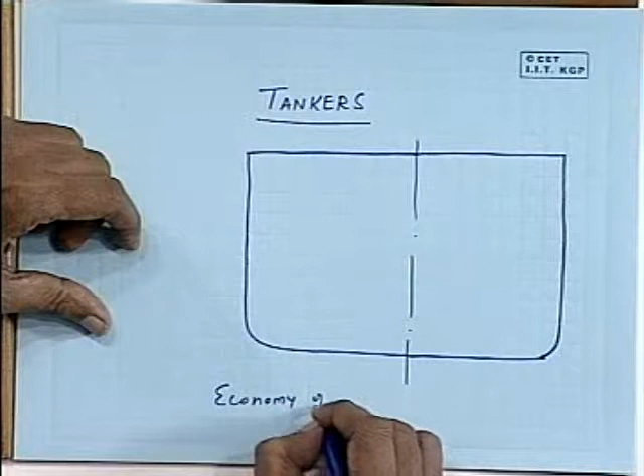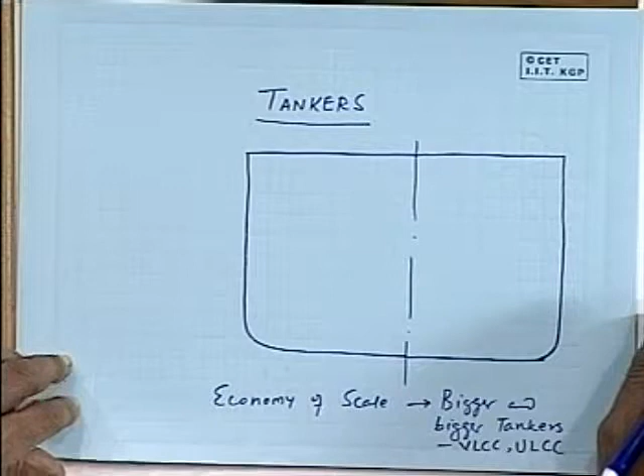So just imagine, stress levels were low, vessel is safe, no complications with regard to cargo handling. And it's just ideal to carry cargo, isn't it? As a mariner you will say, this is really good. And this is what people said, that carriage of oil cargo at sea was the easiest thing to do. And as a result, economy of scale led to bigger and bigger tankers. So you had the so-called VLCCs and ultra large crude carriers, ULCCs, going up to 500,000 tons or even more, at least the thought was there. So this was the scenario in the 60s and very early 70s.

Then came the oil crisis, 73 war, and oil prices went up. So when oil prices went up, suddenly there was no demand for movement of oil as a cargo at sea. Country like India, if oil prices go up 10 times, obviously we cannot import the same amount of oil we imported. This happened all over the world. And oil tanker size suddenly reduced. I am not going to deal with the changes in the shipbuilding side, looking at the design side alone, the development of tankers as a crude oil carrier.

We see that suddenly there is a move towards building smaller and smaller vessels, because economy of scale is fine as long as you have full load of cargo. If you do not have full load of cargo, then you must build smaller ships so that at least your ship is full when it is moving. And as we have discussed earlier, tankers move only half their lifetime with cargo, other half they are moving in ballast. So the tanker size came down to 50,000-60,000. Now I think it is stabilizing around 100,000, 1 lakh or thereabout. Panamax tankers are of course there, 60,000 to 70,000 tons, and people have built slightly bigger tankers, about 100,000-120,000 tons, not more than that.

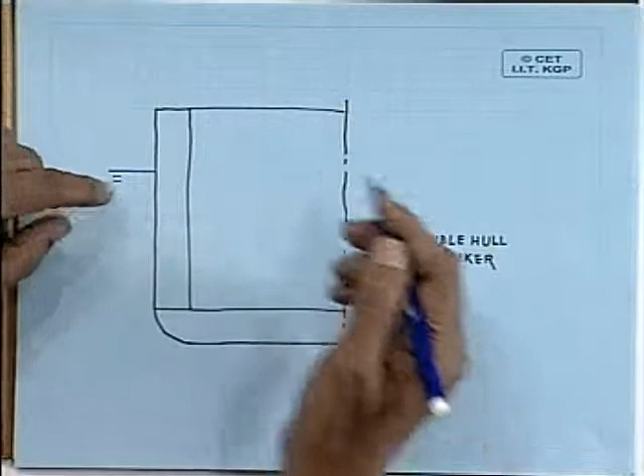You know that tankers are given type A freeboard, isn't it? Type A freeboard means minimum freeboard. This double hull tanker can never achieve a deadweight which will sink it to the maximum draft coming out of the type A freeboard. Do you understand? That means if this is the draft as per freeboard, Plimsoll line draft, you can sink this vessel to this draft only when you have enough cargo weight to sink the ship.

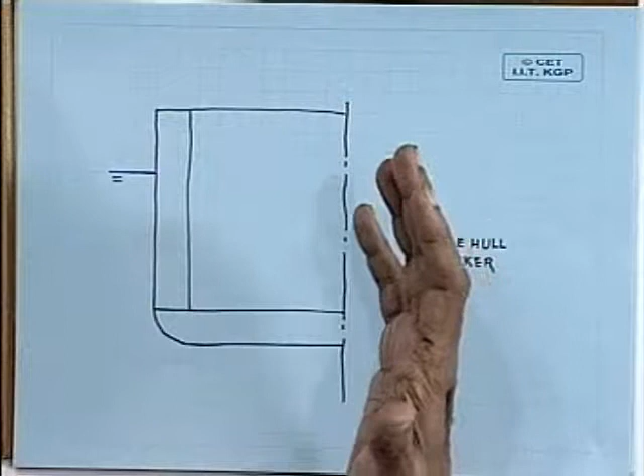Now, oil has a particular density and it can only go in covered holds, closed holds. Once you take away this space, it is not enough to give the ship the type A freeboard. So nowadays for the double hull tankers it is very difficult to achieve the maximum designated freeboard, which means in other words loss of revenue, right. So this is what has happened to tanker business.

And of course, when we talk of voluntary oil discharge, that is discharged through engine room, through bilges, through tank washings and other things, you are aware that a lot of extra equipment has been provided in ships for doing this. That is, you have the oil water separators, you have slop tanks which again take away freight earning space, you have segregated ballast tanks, segregated pipelines, segregated pumps, slop tanks, the small pipelines for cleaning. No, crude oil washing lines, of course, crude oil washing systems you have.

You have these small pipelines for removing the, what is it called? Steam? No. You have these positive displacement pumps and small pipelines for the stripping system, right? Stripping system, you have the crude oil washing system, you have the inert gas system without which you can't do crude oil washing, and you have the oily bilge water separator, you have the oil content meter to measure the oil content, without which you cannot discharge. You simply don't have an avenue to discharge, you don't have a line, and you have to log any discharge you make to the sea. So you see what has happened is, from being a very cheap and structurally sound ship, it's slowly grown into a very complicated, expensive ship which cannot carry cargo as per its freeboard.

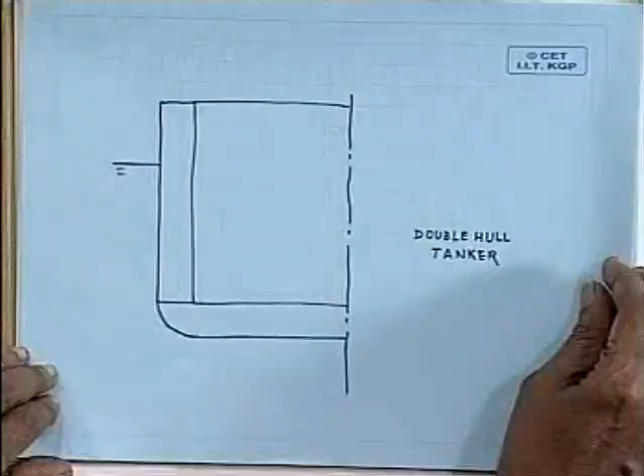So, this is the tanker scenario as of now, and let us see how it goes in future, because as the oil becomes expensive, the freight also becomes more, and to support that you have to have a more sophisticated vessel. You see very interestingly how the trade scenario matches with technical and environmental developments. Everything sort of matches, isn't it? So, this is how it is.

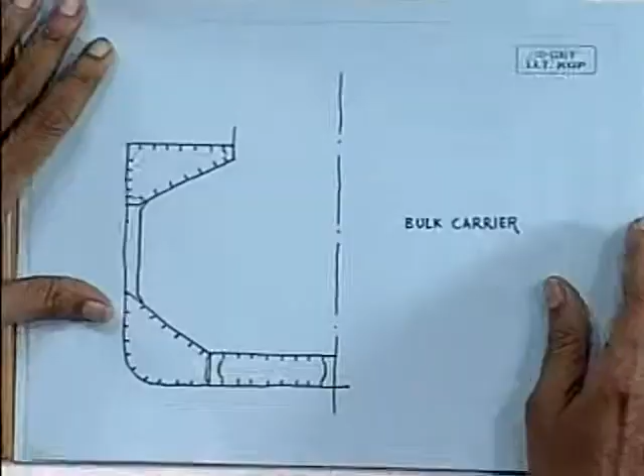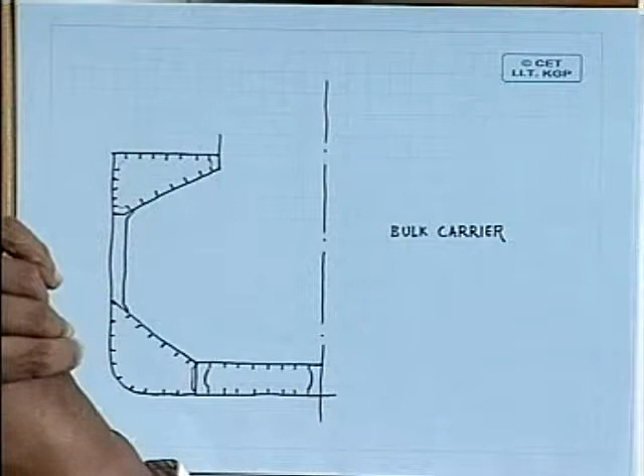Now, let us look at bulk carriers. We have here a bulk carrier. This is how a bulk carrier would look, right? Can you tell me why the top sloping tanks are required? Yeah. So, you have about 30 degrees inclination, so that any light grain which is likely to shift is restricted from shifting. Your grain shifting will be limited to within the hatch covers. You have to calculate that and show to the authorities that your total grain shifting even inside the hatches is within a certain limit. But in bulk carriers, grain shifting is a real problem.

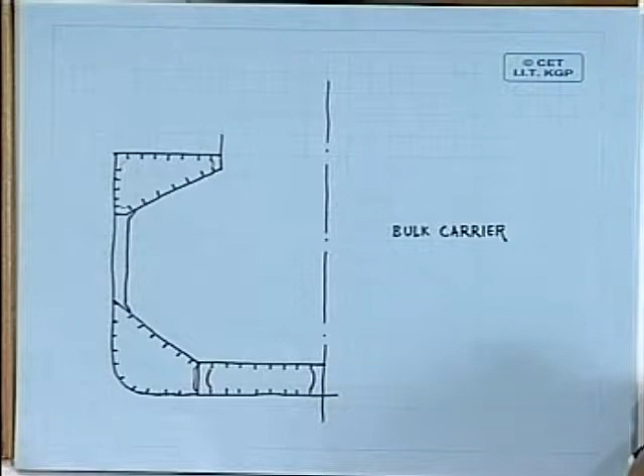What is this for? What is the slope at the bottom for? To prevent the bilge plate, protection of the bilge plate. No. For easier collecting. Roll down of the grain. Yeah, right. Roll down of the grain.

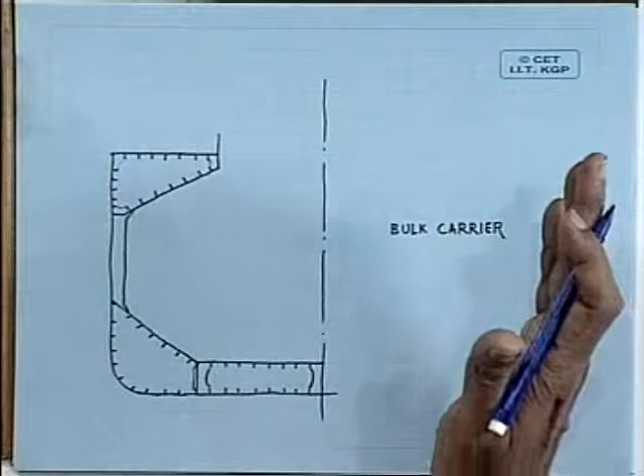Okay, bulk carriers were increasing in size as tankers, not to that big size, but fairly big; 2.5 lakh ton bulk carriers were thought of and perhaps built. But today, the scenario is the same as tankers. Nobody wants to take risk in building a very large bulk carrier. So Panamax is the maximum size, going up to 100,000 tonners again, like tankers. Tankers and bulk carriers are more or less in the same size.

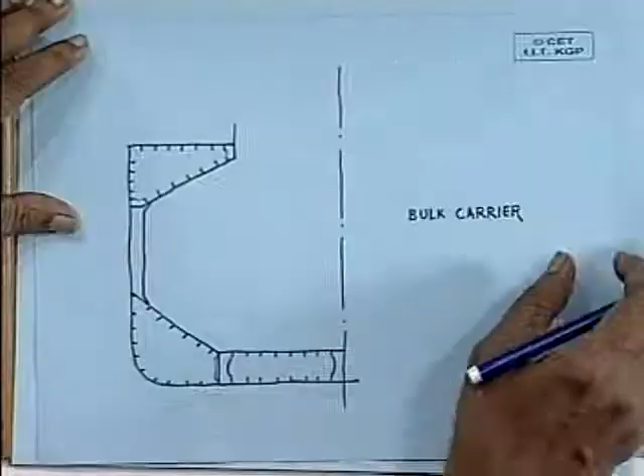Can you tell me what you do with this space? Wing tanks. Yeah, we can use them for ballast. If you are carrying a very light cargo, you could also use it for carrying cargo by providing manholes on top. Okay.

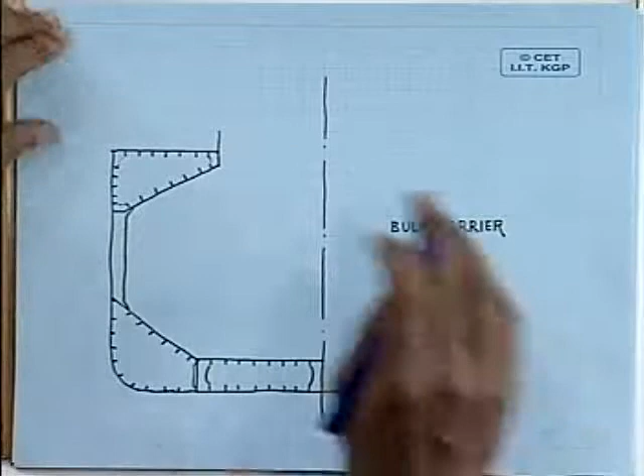Bulk carriers generally don't have a hull girder strength problem. If the hatch cover is limited to about half the beam or a little less than half the beam, then it should not normally have a hull girder strength problem from the hatch side. But do they have any other problem? Am I making a correct statement when I say that bulk carriers will not have a hull girder strength problem? Such as? Recently they have had a lot of problems because of corrosion. I am talking about hull girder strength. Okay, let's see.

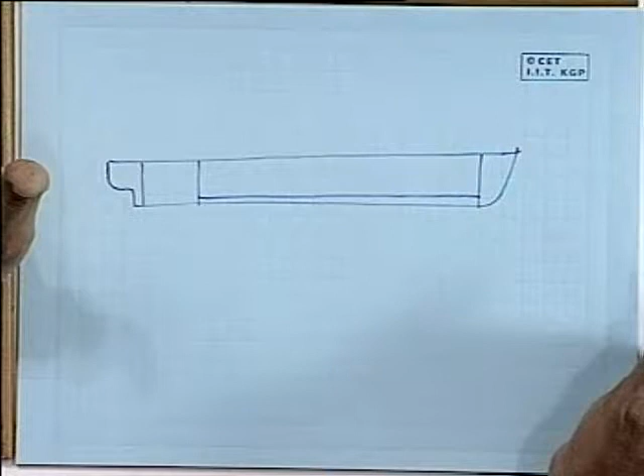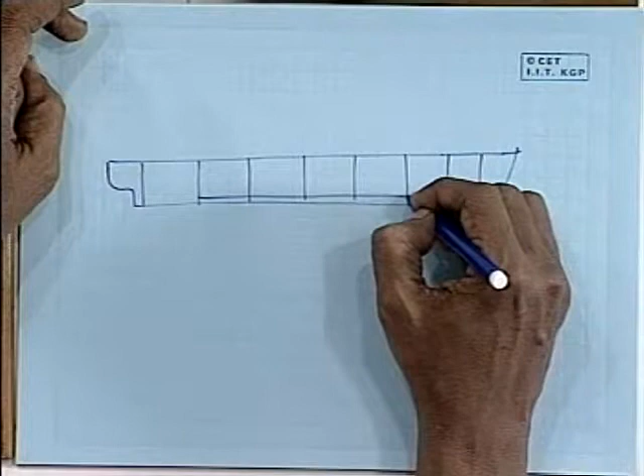Let's say this is a bulk carrier. The engine room aft bulkhead, engine room forward bulkhead, this is the peak bulkhead. Remaining is cargo hold. Load curve is very difficult. Why? Suppose you are not loading in all the hatches. Yes, that's right. Now suppose we have got a number of holds here. Sorry? Cargo will load in all the hatches. Full we cannot load. That is stress calculation. Why not? It's like this.

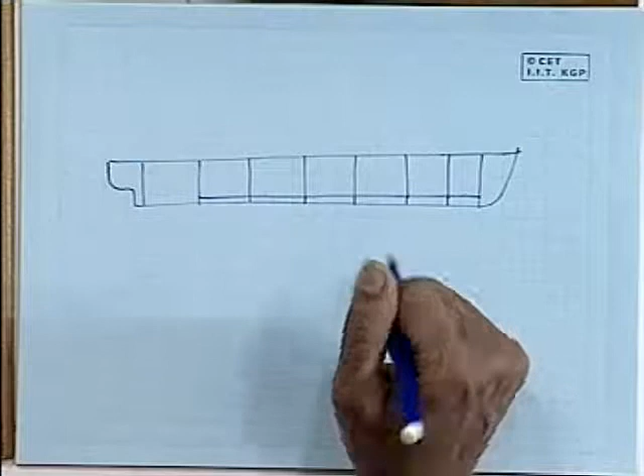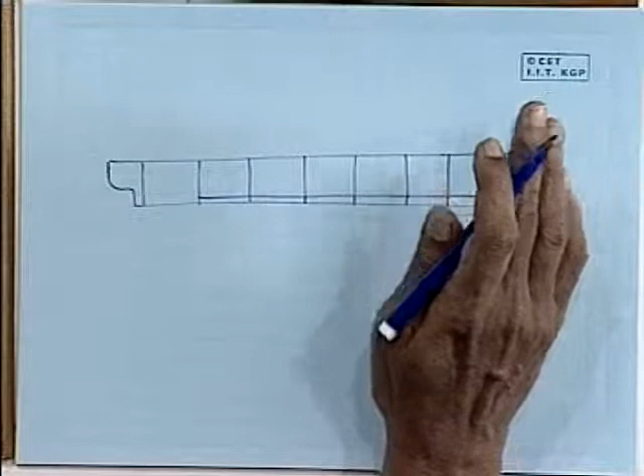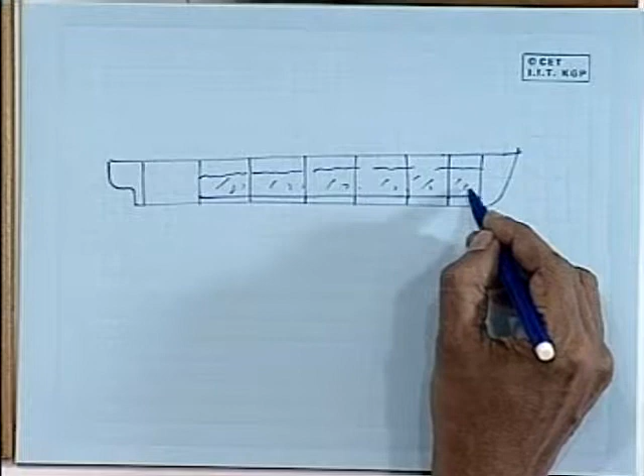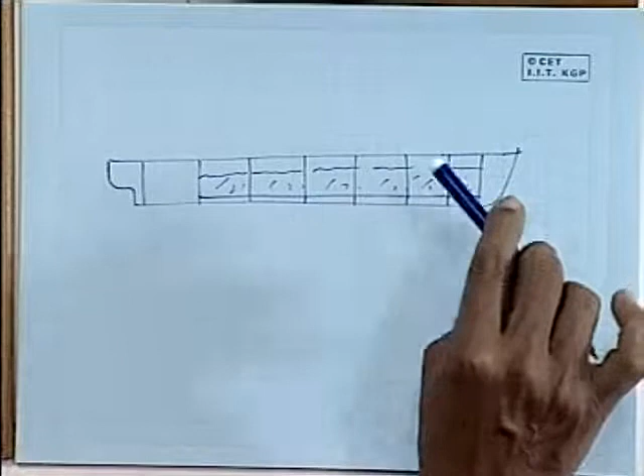If I have got a light cargo, I can load all my holds. Suppose I am carrying heavy cargo. Ore is a little extreme; we look at ore separately. Let's say I am carrying fertilizers, where the density of cargo is roughly 1 ton per meter cube. I don't require all this volume. I have two options. I can load all the holds half, till this, right, and go. Fertilizer is quite dense, it will not shift. The problem with this is I have to operate on 1, 2, 3, 4, 5, 6 holds at the loading point and also at the unloading point. That no operator will like to do.

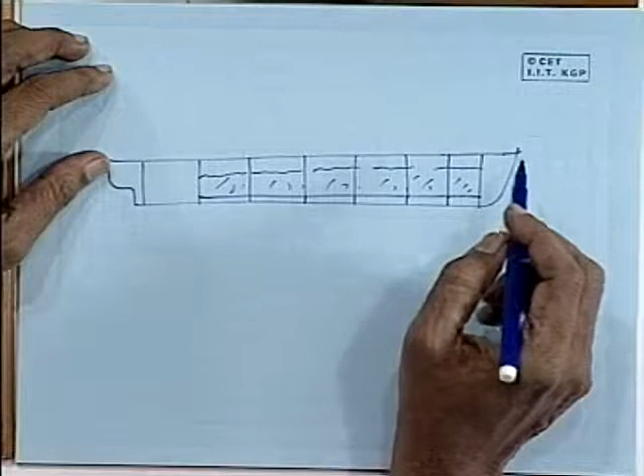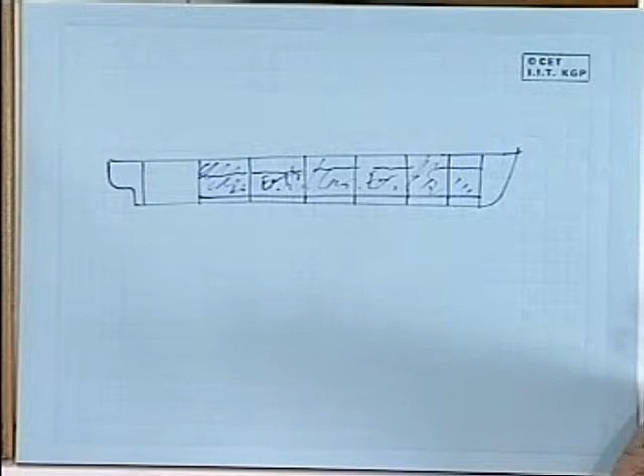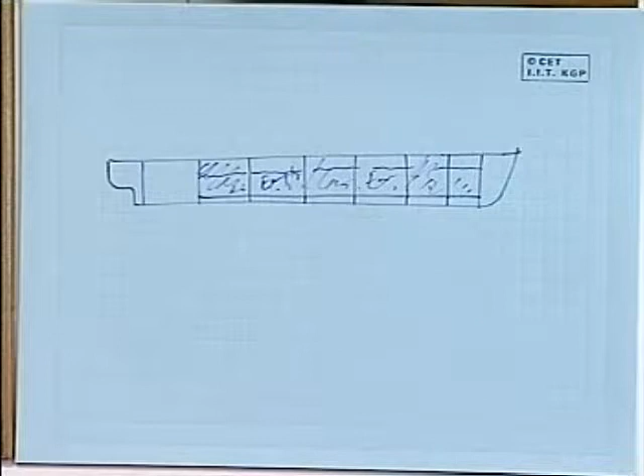I have another option. I can load this fully, leave this empty, and load this like that, empty, and so on. This creates problems. Shear stress, of course, and also bending moment; the maximum bending moment may shift from midship to the sides. You understand that? So you have a hull girder problem in bulk carriers, and you have to be careful about it. So your class gives a separate notation that a specific hold loading condition is satisfied, and the holds have to be marked, which holds can be loaded and which can be left empty.

Apart from this, as Mr. Mukherjee has already told us, there is a problem of corrosion in bulk carriers. But why specifically in bulk carriers? Why not other ships?

Why in bulk carriers? It's mainly because in the cargo holds, after removing the cargo, the remnant cargo remains there, and water also tends to remain in those areas. And corrosion of the strengthening girders that takes place weakens the girders in time.

And the keel plate, the bottom of the ship, is the region where the higher stresses are involved. So damages arise from weakened girders, weakened frames, and access to those frames is also very difficult for investigation or checking, so they remain out of sight.

Yes, perhaps to some extent what you are saying is true. Two or three other things apply to all ships, but bulk carriers perhaps more severely because of the same thing, the corroded plates. When plates corrode, they also undergo fatigue. Normally these cracks and bulk carrier failures that we have talked of are generally for older ships. We don't hear of a new bulk carrier breaking up and going down into the sea.

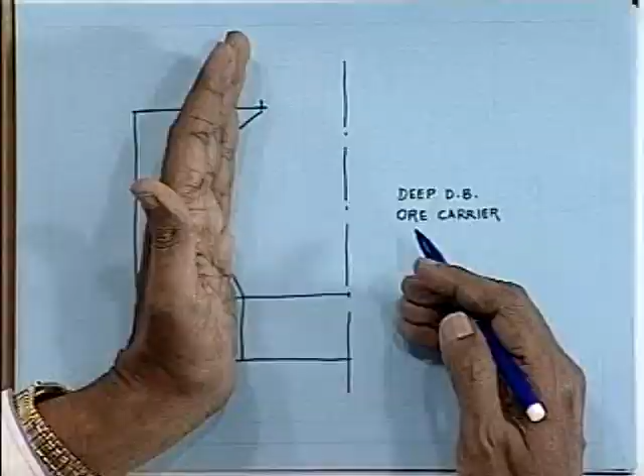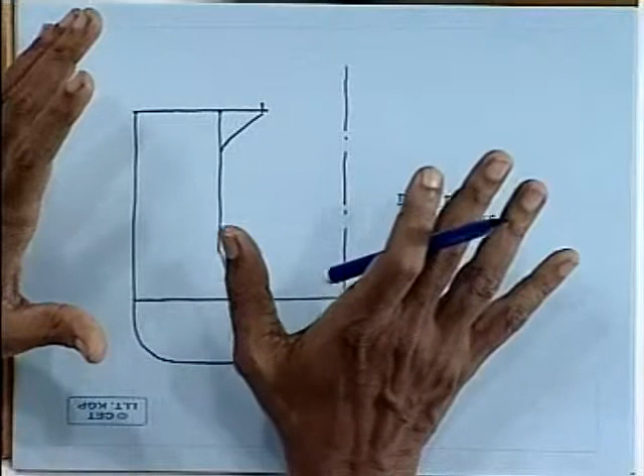Compare them. The double bottom height is increased; we have a very high double bottom. Also on the side, we have a side tank which moves the cargo to the center. So the cargo is loaded here, automatically raising the CG. And answering Mr. Kumar's comment that cargo loading and unloading will be difficult: if you have a smaller space, perhaps the difficulty is much reduced because you are handling the same volume.

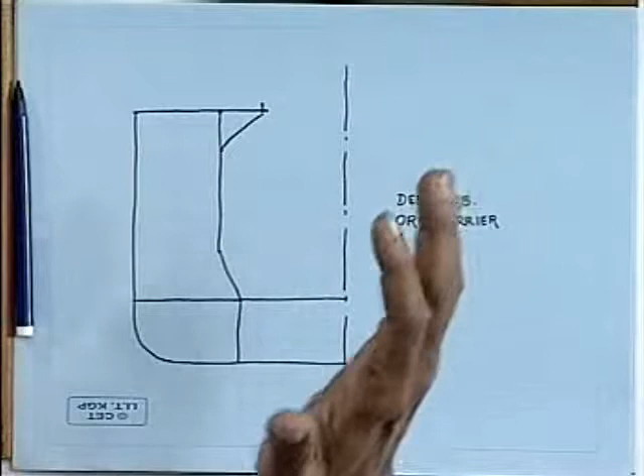What is the alternative we have? Use the same conventional bulk carrier with alternate hold loading or specific hold loading. Compared to fertilizer, the problem magnifies in an ore carrier because ore is much denser. So wherever you have cargo, you have a very high weight curve coming up there, much higher than fertilizer.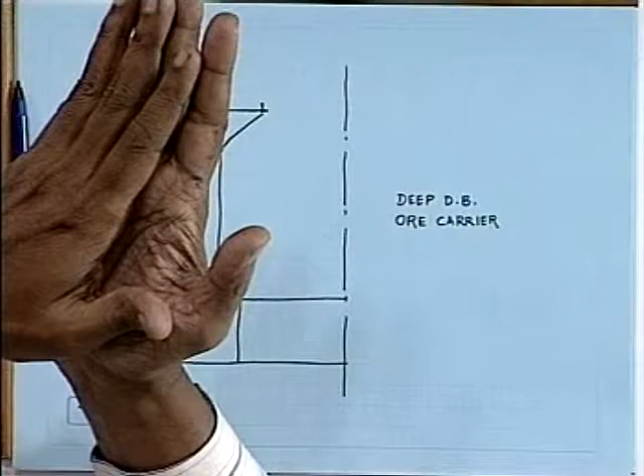What is the stowage factor of ore? It would be about 20 CFT per ton, whereas fertilizer will be about 30 to 35 CFT per ton, and grain will be much higher, anywhere from 50 up to 65 CFT per ton depending on the type of grain.

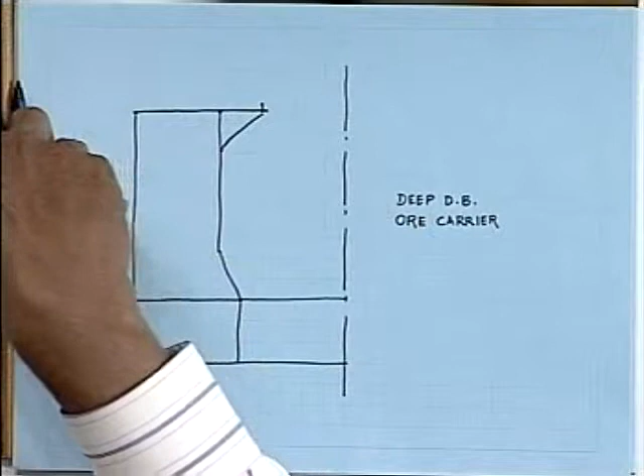So for this purpose, ore carriers are designed like this, leaving a lot of empty space all along the length of the ship and raising the cargo to a height. By shifting the cargo from the side we are also increasing the height of the ore that is loaded, because that removes some height for the empty space. That's right.

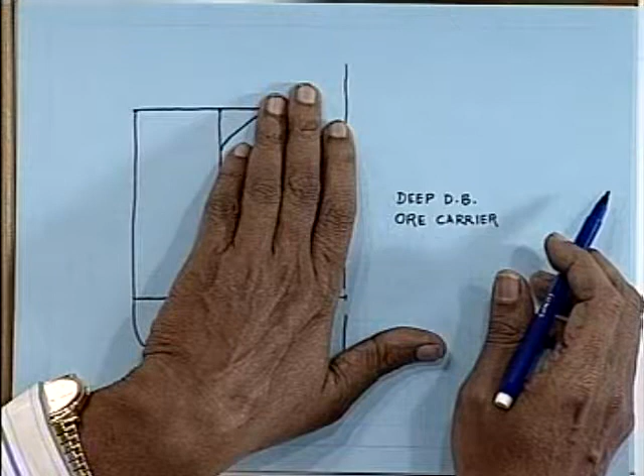Then, as I mentioned, I would leave out cryogenic ships, apart from saying just two or three sentences: these ships started with about 5,000 cubic meters capacity, LPG and LNG carriers, but today we have 125,000 cubic meters of carrying capacity, going up to as high as 300,000 cubic meters in the latest LNG carriers.

Now these ships are basically of two types. You have the circular spherical tank type, or you have the membrane type, rectangular, fitting into the ship's shape. There are a number of problems in cryogenic ships, apart from carrying cargo in either pressurized tanks or at cryogenic temperatures and the technology for maintaining that pressure and temperature. You have a number of other problems, primarily on the material side. Correct me if I am wrong.

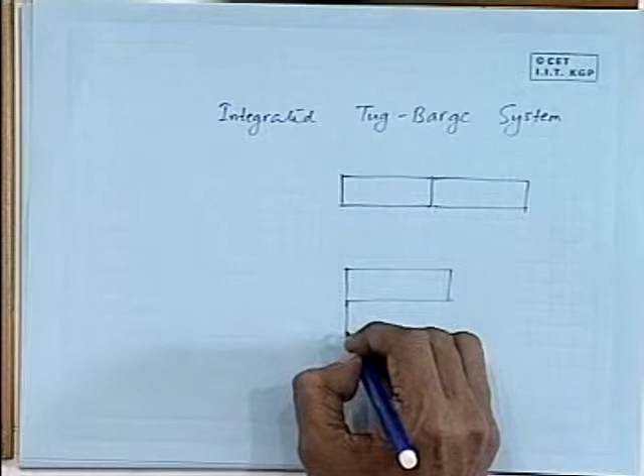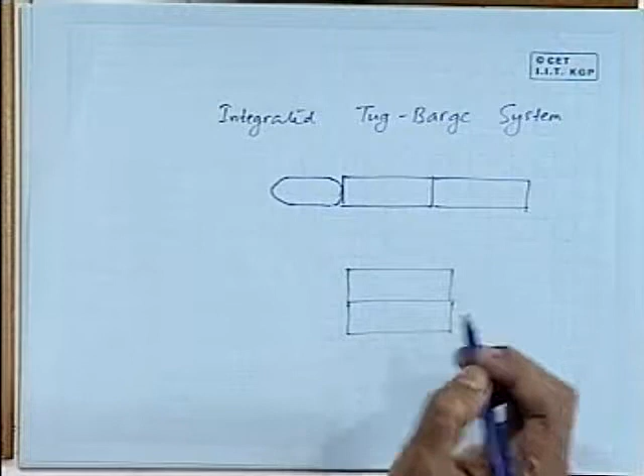Okay, a tug barge system would be one in which the tug houses the engine. It gets into a recess in the aft side of the barge, fits snugly, and then pushes the barge. It becomes one ship, and then it goes. Now in reverse, we have flotillas. We have these barges. You can have a number of barges like this, or a number of barges like this, and you have a tug coming up like this. This is typically a flotilla in a river.

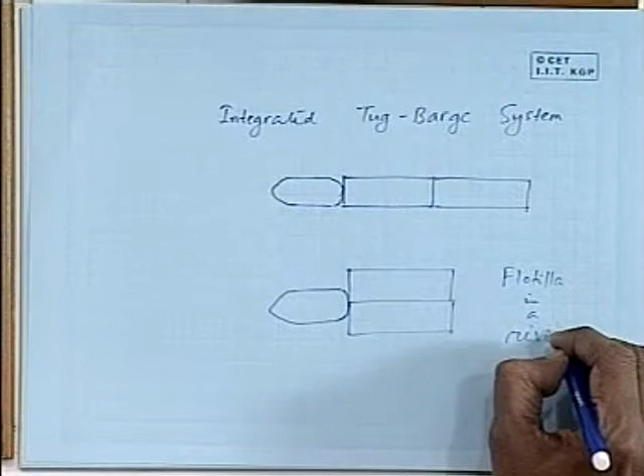This is also a tug barge system, but this is a river system, which is not subject to the type of loading that a sea tug barge system would face. So here we can even tie up the tug and barge by ropes. We don't need metallic connections. By tying up with ropes, while the tug is pushing it, the barge still has freedom for moving up and down, the heaving, trimming and rolling motions. Most of the motions except surge are independent of each other. In a river these loads are very small, so this is not a problem in rivers, but in sea this cannot be.

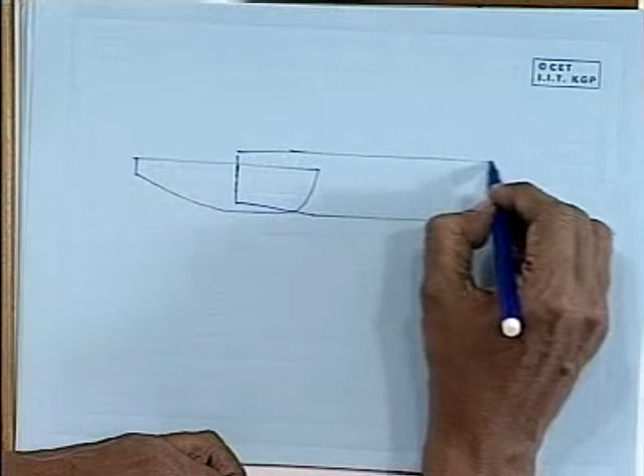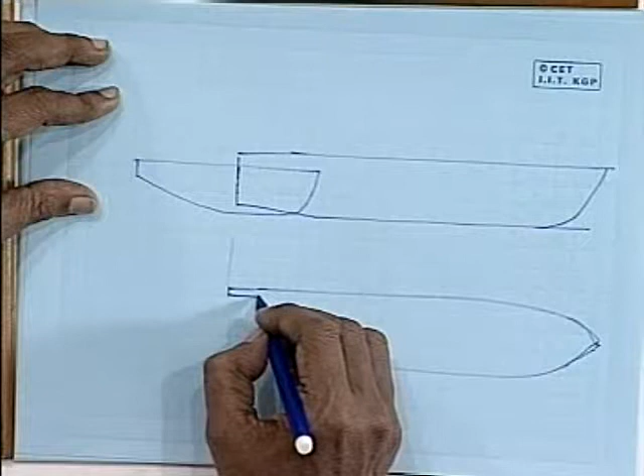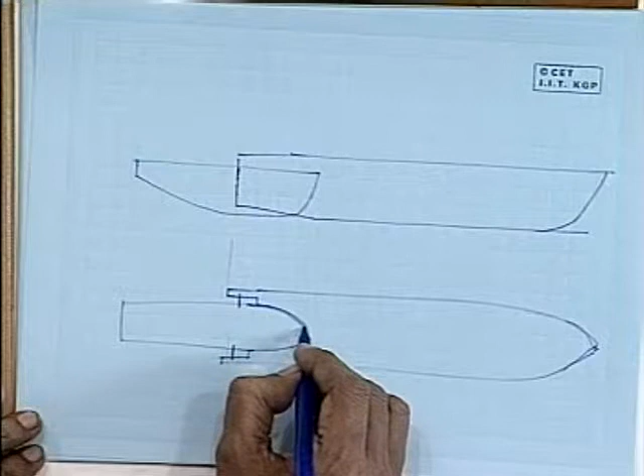In sea, a tug barge system would look something like this. This is a tug, and the barge is ship-shaped at the forward end, and the tug comes and fits snugly inside. If you look at the bottom, it would be like this. This is the tug. There will be some connections here. The tug actually sits here, and this is connected, and there are some connections here. So this becomes a single unit. Sometimes you may have a foldable beam which comes from the barge, is put on the tug and locked up.

So what is the advantage of this system? The barge can be left in port and the tug can go carry other barges. Yeah, it's maximum utilization of the tug. Also, if one tug is out of order, you can have another tug push it, so your trading is unhindered by maintenance, repair, port problems, etc., and it can still go around and produce. Less manning. That's very important. Yes.

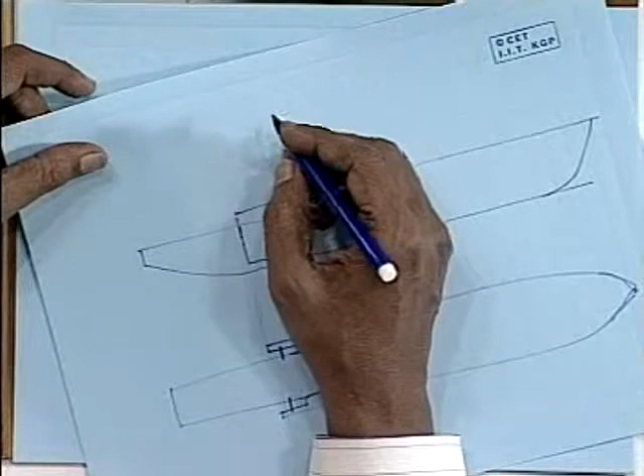Okay, now let's talk about passenger vessels. We haven't talked about passenger vessels. Do you think it's important? Yes? Okay, good. In the good old days when there were no planes, people moved by ships. Then came aeroplanes, and passenger movement reduced, virtually coming to a standstill in the 70s and 80s. Today we have increased passenger demand. What sort of ships are in demand? Let's see.

If we talk of a ferry lasting 3 to 4 hours of journey, what will be our concept of such a ship? Just 3 to 4 hours. That is, say, crossing the English Channel from Dover to Calais. 4 hours, maybe maximum 6 hours, not more than that.